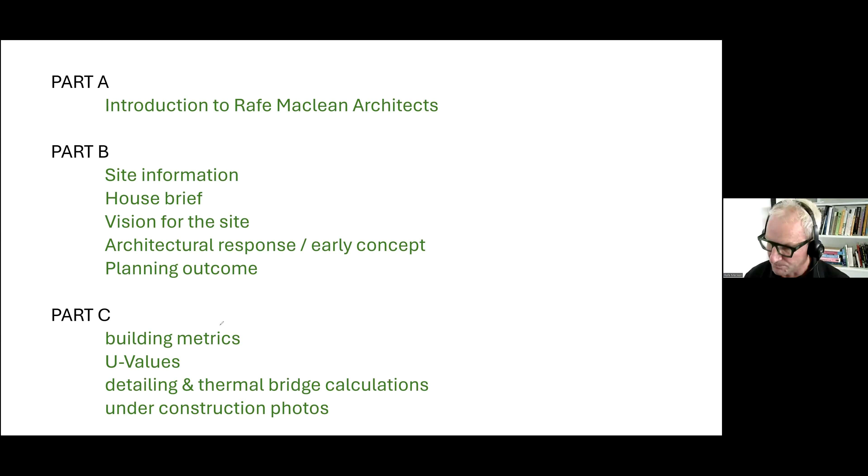Firstly, practice, Rafe Maclean Architects. We're based in Wanaka. Currently we have 6 staff, all here in one studio. We do pride ourselves on designing contemporary buildings that are also very good for the environment, very low energy use, and passive house is one important tool we use - we do thermal modeling on all our projects. Not all our projects are passive house certified.

Looking at all our work, our portfolio since 2005, around 20% of our work since 2005 has been Passive House certified. So we don't do many projects, but that statistic will improve over time because we only learned about Passive House in 2012, so there's quite a period there that we didn't really know what we were doing. Well, we didn't know what we were doing, but we weren't thermally modeling the buildings.

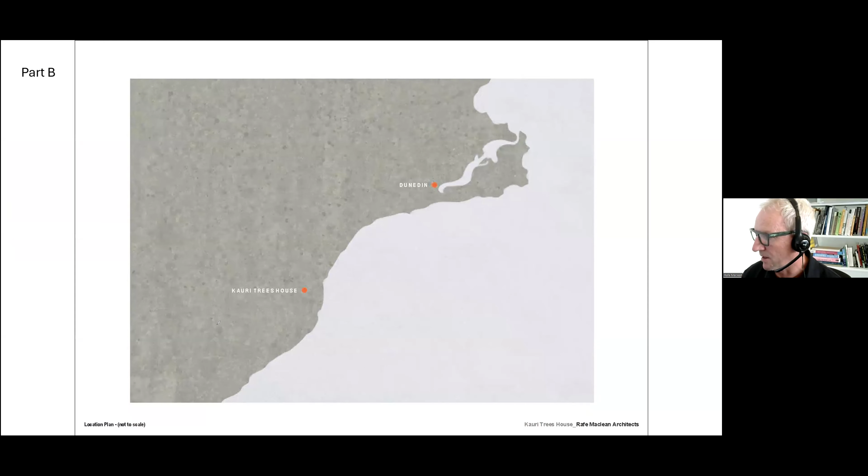About the climate of the site, this is extracted from PHPP on the climate data, so it's been altered for the altitude - altitude is 182 meters above sea level. Interesting thing here is just the exterior ambient temperature. In peak of summer it averages around 14 degrees on average, and then in winter around 6 degrees. So quite a cool environment, quite close to the sea.

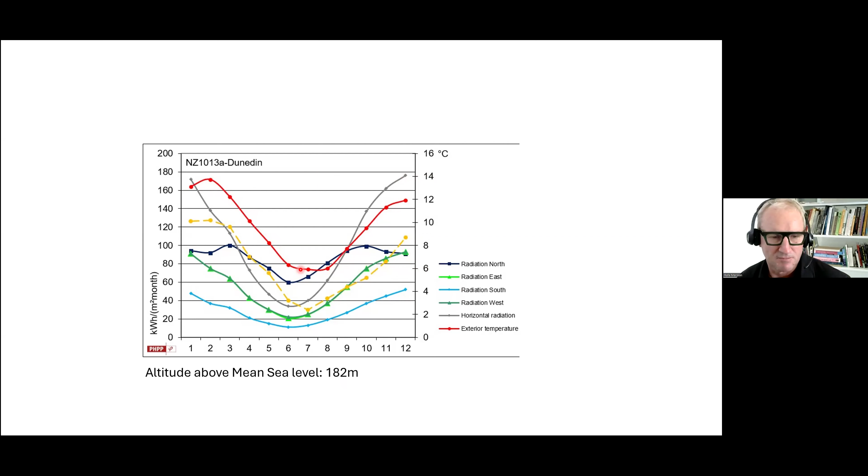And this picture here just shows the sun pathways. I often do this on the first visit to site, just to get an idea of where the sun comes up and where it sets. So looking east, that's where the sun rises over the sea in peak summer, and that's where it rises in winter. Looking towards the west, up the ridgeline, that's where the winter sun sets around 4:30, and then around 9 p.m. midsummer.

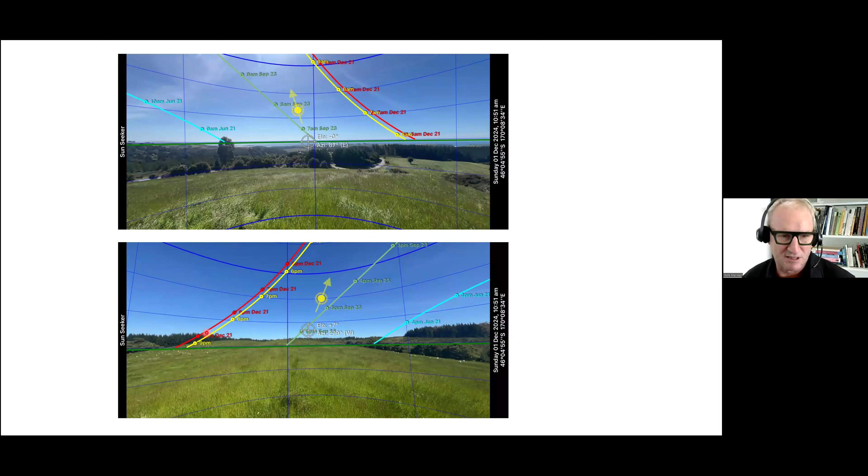In 2024, that's when we were approached by Peter - we were asked to be involved in the project - and Peter's initial brief was around 18 pages long. I think it was probably the longest brief we've ever received in terms of content and requirements.

So this is just the basics from it, looking back at the most important things. Certified passive house - yep, we could do that. Earth sheltered - well, we had to find out a bit more about what that meant. Architecture award winning - we try not to talk about that too much because it's not something you can really anticipate.

Concrete construction. We had some experience with concrete before with precast panels, so we knew the language. At that particular time, I'd just returned from a trip to Japan, and I experienced some wonderful architecture over there using in situ concrete. So I was quite excited to read this and go, okay, I know what the Japanese can do with concrete underground, and so it made me smile.

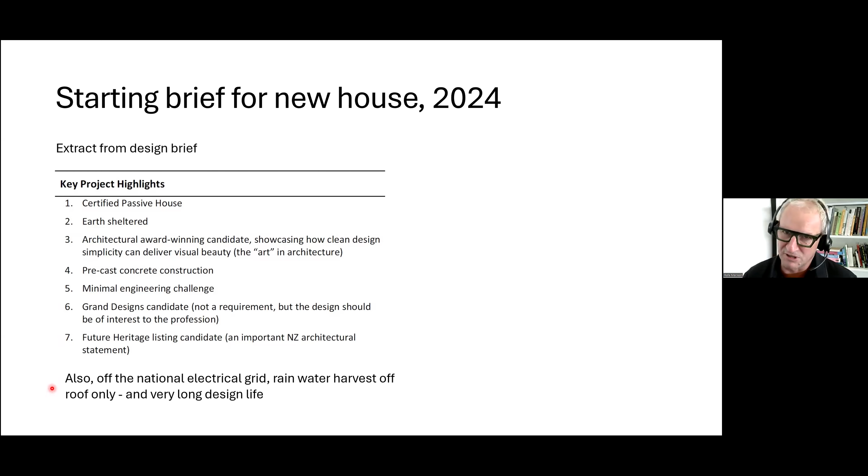About the site, a key driver for the project is Peter's vision for the site. This is an extract from the Kauri Trees website. The address is up there, and I'll mention it later again. This website tells you all about Peter's vision for the property, and the main vision is that he would like to establish the southernmost Kauri forest in New Zealand. He's started by planting thousands of nurse trees, and this year they're going to start planting Kauri trees, which have been propagating in a nursery nearby.

And this is a picture of the site, boundary there, and this is existing native planting in the valleys, and this is pine plantation surrounding the properties. And the site for the house is just up here, on this little knoll here.

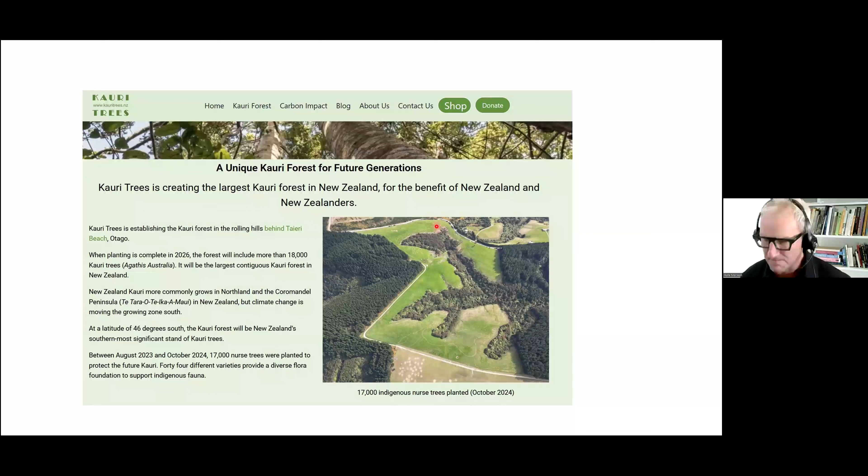Concept for the project. This is just a quick overview of basic concepts that we started with. This is a map of the property of the site. There's the ridge line coming down here, and there's three ideas that I pulled into the project. One is how do we have an underground or submerged building that captured the sea view over here to the east, but also not be totally underground so we can't get any daylight.

So the idea of having a C-shaped building, hugging the ridgeline, following the contours around. And we talked about having courtyards in the building for shelter from the wind. So this C-shape formed its own natural courtyard in the middle. So it was a good start.

And then also thinking about how do we insert spaces into the ground and have livable spaces that we can bring light in, we can see out to the view, and uplift the soul, etc. And thinking about grafting spaces into the land, how do we insert them in under the soil?

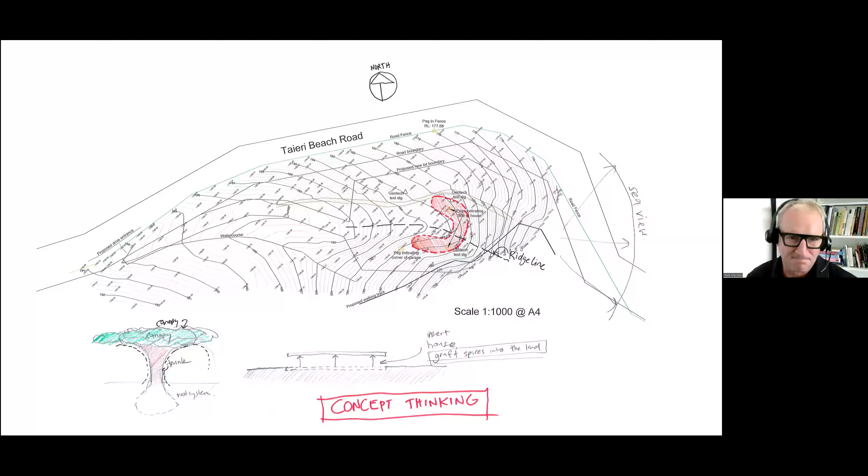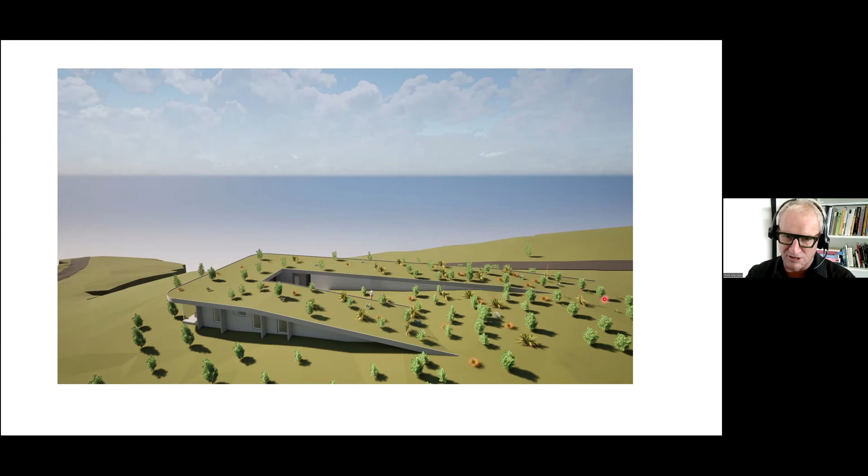The first concept idea was, we've got the C shape going, east out here, and basically when you approach the site from above, the building is camouflaged because the ground's been lifted up and the spaces have been inserted underneath the ground. The word grafting came up a few times. So that was the first crack at it, just to see how the spaces could work and what scale this building was going to be.

And that idea was developed a bit more. We lifted the roof edge up when we started to think about the practicalities of someone climbing up onto the roof and falling off it, and trying not to have barriers. So basically we made sure that the roof was more than a meter off the ground, so no one could climb up. So that was the barrier.

We looked at green roofs, and because we're rain harvesting off the roof, we looked at the calculations about the rainfall. Taieri Mouth gets just over 500 millimeters a year of rain, so not much. So we worked out that the plants were actually going to take too much water from the roof to grow. So we pulled this back to ballast only, and then reintroduced planting as we got an idea of how much rain is actually falling on the property, servicing underground tanks which serve the house.

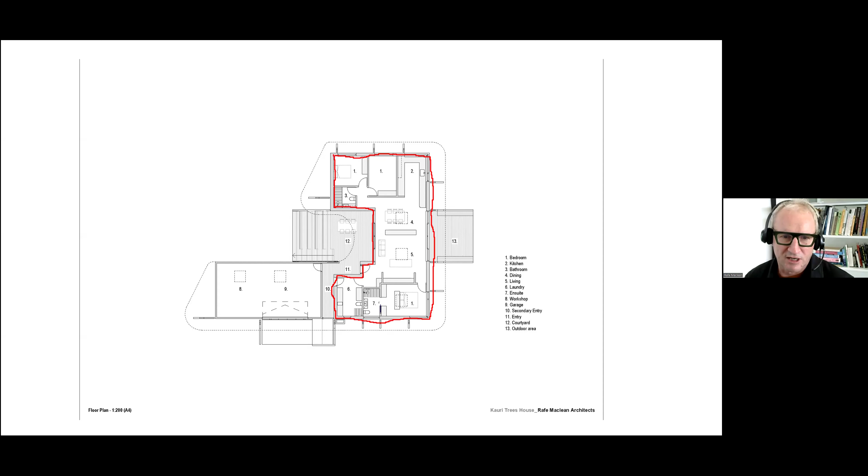Floor plan. So this is the thermal envelope. I'll just draw this with my mouse. So that's the house. We've got 2 or 3 bedrooms, kitchen space, the big window to the northeast, living space here. Main bedroom, ensuite, laundry, and a back entry, main door here.

And this is where you enter from, coming down the ridge line. You come down into this courtyard space, and from here you can look right through the building to the sea. And then this area here is basically the garage space. So that's unconditioned space. It's not insulated at all.

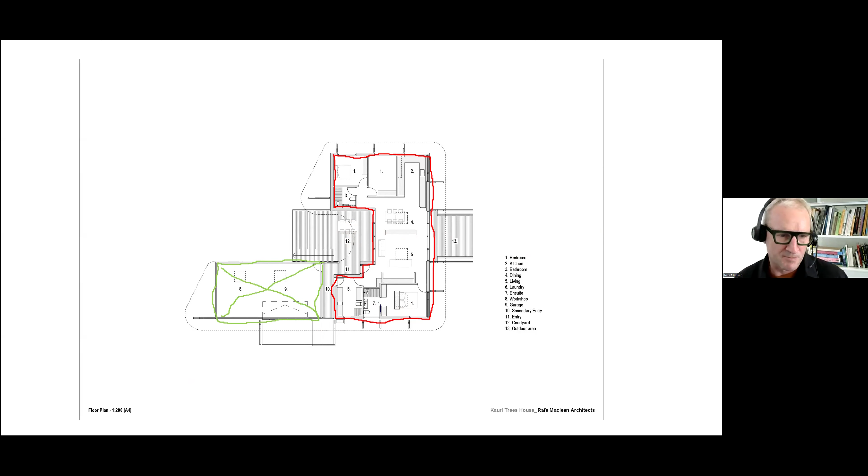Roof plan. So there's the outline of the insulation on top of the conditioned space, and we've got 3 roof lights, and over here we've got the outlets to the underground water tanks. So the water falls on the roof and drains to these points.

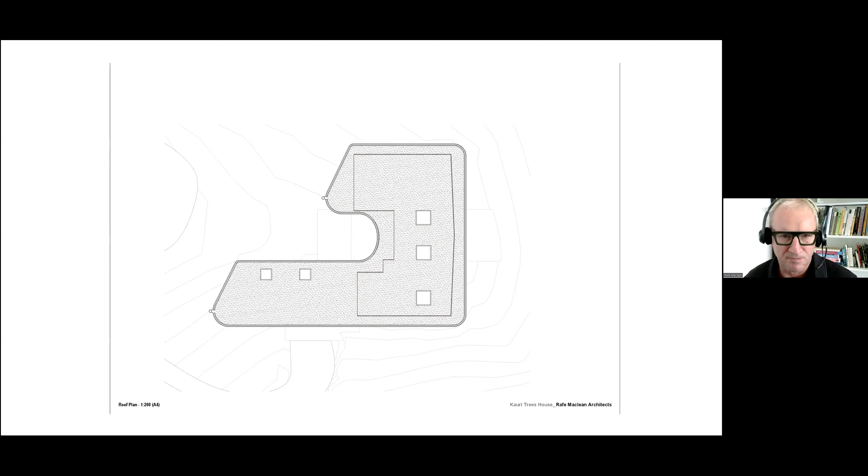And just quickly, I'll just touch on the sections so you can sort of get an idea. These are underground water tanks, and 1.5-degree slope, around about 3.1 ceiling height at this end, at the high end, and about 2.6 I think it is at this end. So quite high ceilings. And we've basically inserted the building but then pushed the earth back. So when you're in the kitchen space or inside, you get the feeling that you're underground or partly underground.

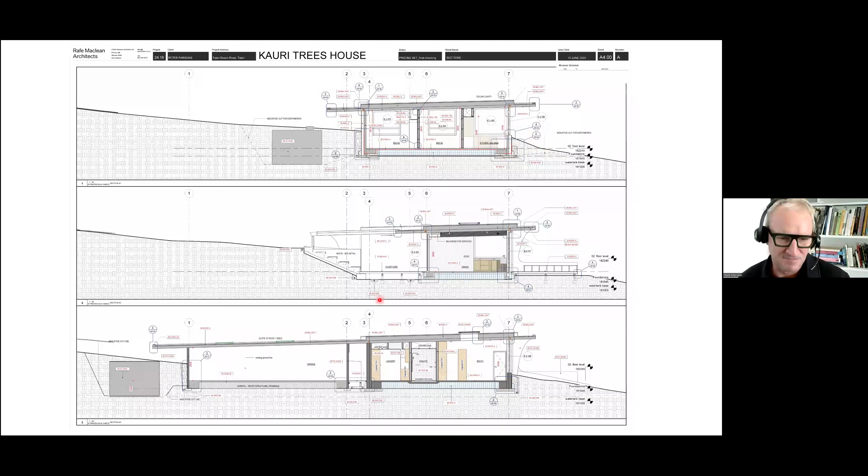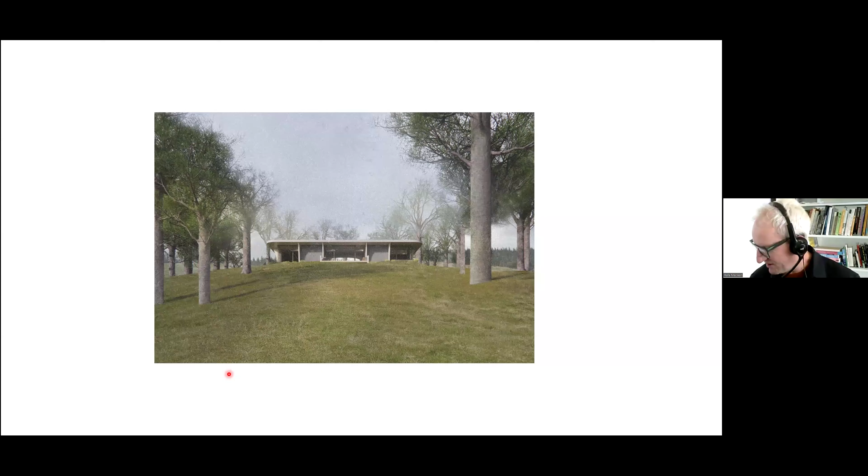And some late documentation stage renderings just to get everyone excited, especially with the mature Kauri trees. So we're sort of projecting a few hundred years into the future. Yeah, so it's a view from the east. View from the north, southeast, I think it is. Actually from the northeast, sorry.

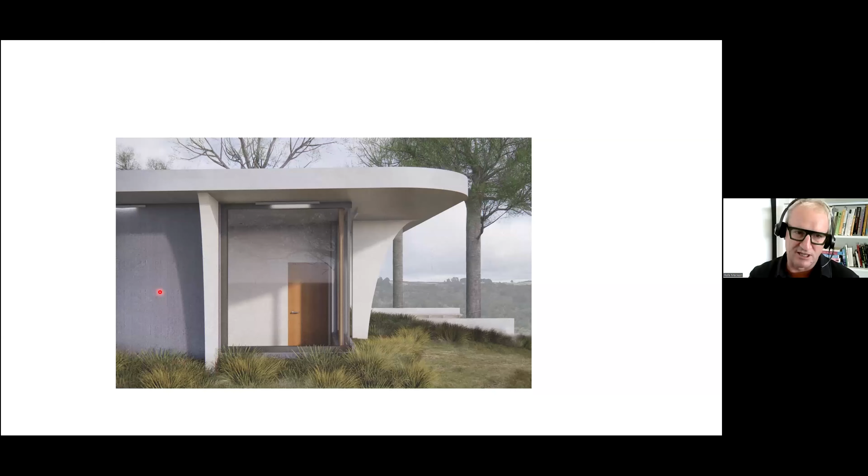And that's a concrete roof, and we have got these curved buttresses that hold up the roof, going back to the concept of that shape of the trunk going up to hold the canopy. So all this is all in situ concrete. The roof, these are precast buttresses, and then over here, which is part of the thermal envelope of the wall, that's a Sto plaster system over insulation onto a concrete panel.

And that's a view from the western courtyard. So you come down the steps, and you've got a view right through the building to the sea beyond.

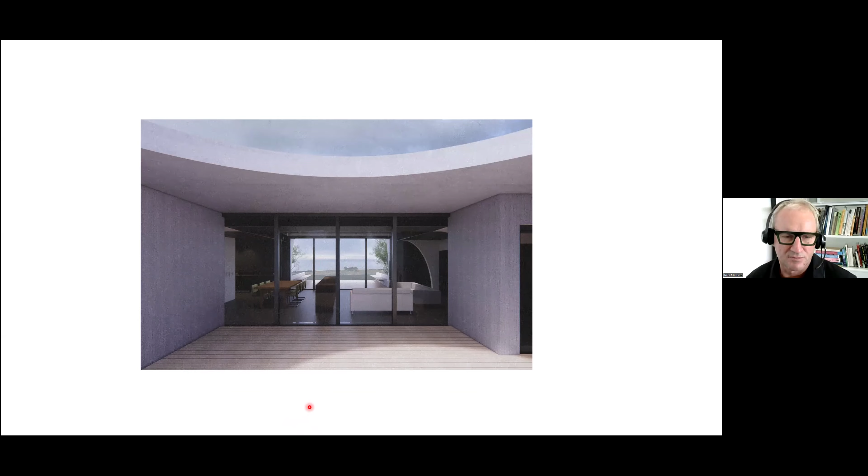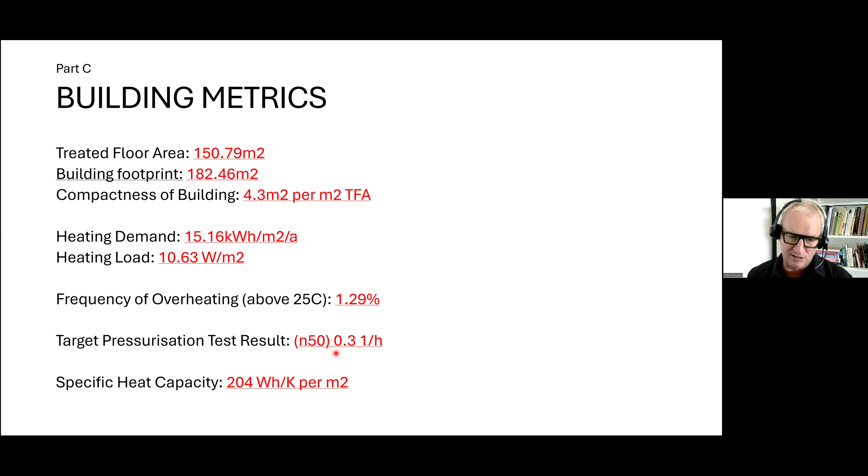And just a comment on that: we've been putting 0.3 or 0.35 into our PHPP at a pre-construction stage, because what we find is that if we put 0.6 in and the airtightness test comes back at say 0.15 or 0.2, it's a huge shift, and we find that overheating jumps up a lot because of that. So if we go in at 0.3 or 0.35, if there is a shift, it's not as big.

And we're finding that 0.3 or 0.35 is not too hard to obtain now. A few years ago, it was quite hard, but now with the contractors being more skilled at it, we're getting better results. And a comment on the specific heat capacity, which is the thermal mass in the building: this is the highest it can be in PHPP, because the floor is concrete, the walls are concrete, and the roof is concrete. So we use that. That's the first time we've done it that high.

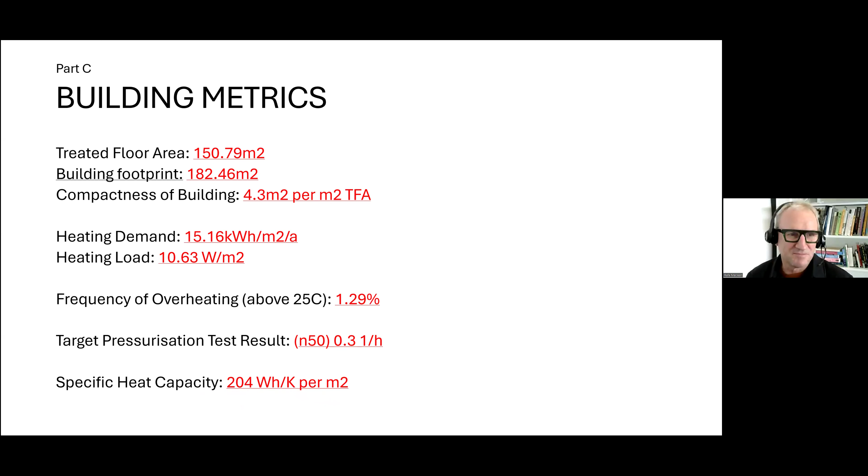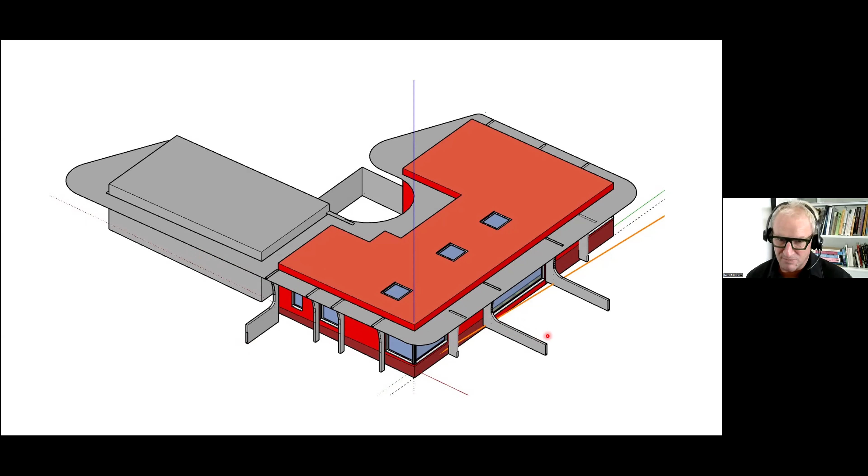Using Design PH, which is the SketchUp plugin for PHPP, was really useful in this project, because of the shading from these buttresses, very hard to manually calculate those. The red is the thermal envelope with the windows, and the grey is the self-shading of the building, so overhangs, buttresses, and there's a garage over here as well. Beyond this is the site shading, which is the surrounding hills. Just another view of the Design PH model.

Jumping into the makeup of the building, because all the envelope is all the same material, these are very simple compared to, say, a timber frame building. So the floor here, we've got basically 100 mil of concrete, and then 500 mil, half a meter of EPS insulation. And then the roof, we've got 180 millimeters of reinforced concrete, and then 300 millimeters of PIR, which has an aged derating factor in there as well, and then the membrane on top.

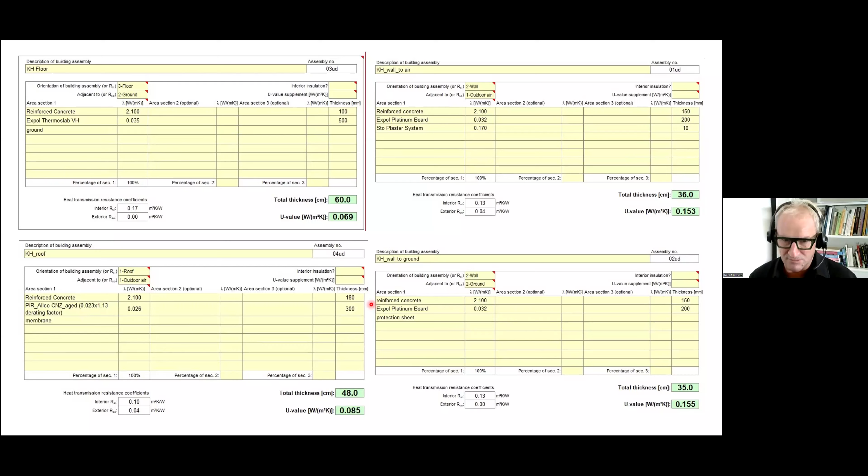And then two wall conditions. One is to air, and another one is to ground. So to air, we've got the concrete panel, which is a precast panel, 200 millimeters of EPS, and then the Sto plaster system. And then underground, we've got concrete, EPS, and a protection sheet. So very, very simple in terms of the envelope makeup.

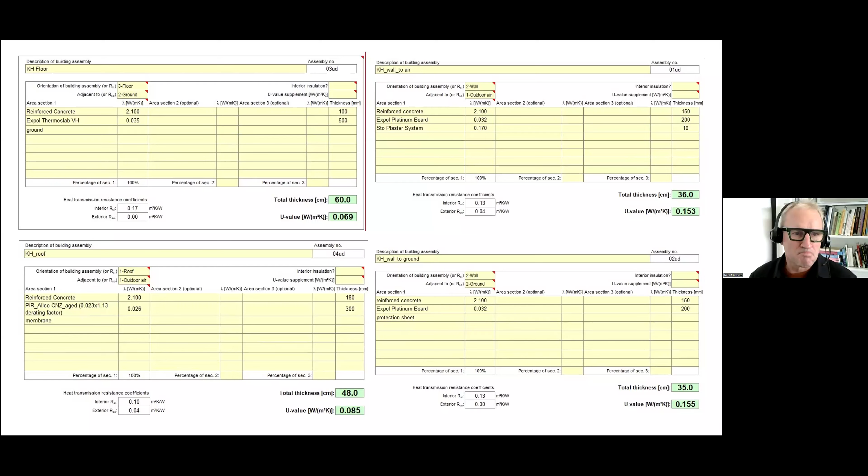Just going to talk about this detail at the bottom here first, which is the foundation. One thing we work with a lot is the thermal bridge software. We use Flixo, and we used it a lot in this project to optimize the detailing.

And also working alongside the structural engineer, especially around the bearing capacity of insulation, and making sure that it's going to work for them and also work for us, and also working with, in this case, Allco, with the flooring, the tanking membrane, and then its junction to the Sto system on the walls. So quite a complex detail, which had quite a lot of iterations just to get right.

Now, for example, here we've got the platinum EPS on the outside, which Sto had to be happy with using, and also Allco had to be happy using as well. And then underneath we've got Slab X EPS for the bearing capacity underneath the foundation, and then there's this 500 mils of, I think it's just S grade EPS over here.

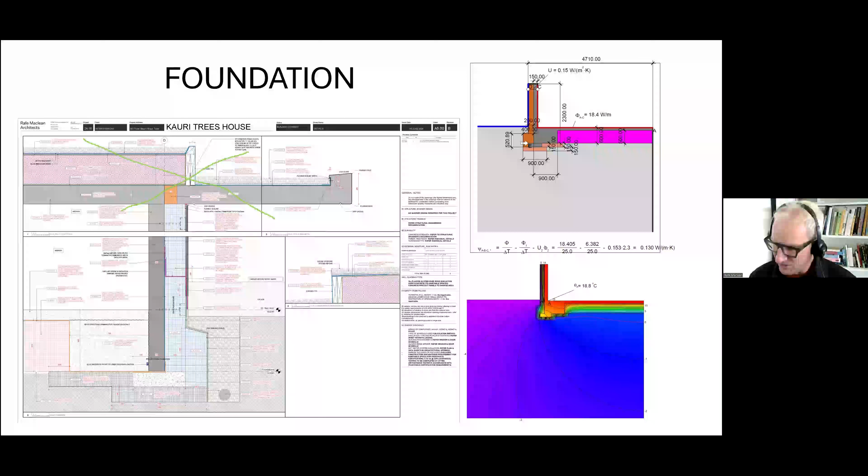The eaves are particularly special, unique. I'll try to explain this. We've got a concrete roof here, and it extends out to form the eave. And to make this thermally efficient, we've put a thermal break here, and of course that needs to hold this eave up. So we've used a balcony connector, which in Europe is typically used for balconies outside of apartments. So this is imported technology. This is a picture of one system here.

And you can sort of see over here, these thermal pictures, that without a connector, you can see the lines here and an internal surface temperature just in there of 16 degrees. So it's a bit of a cold spot right there. And then with the connector in there, this internal temperature jumps up, and it's quite a smooth color going right around, which is fantastic.

The conductivity of these isn't that great. It's about 0.13 from memory, which is about the same as a piece of wood, but it's got the strength to hold the balcony up, hold the eave up. So this was quite a task, because we had to get the BMC, the structural engineers, comfortable with this system before we could specify it.

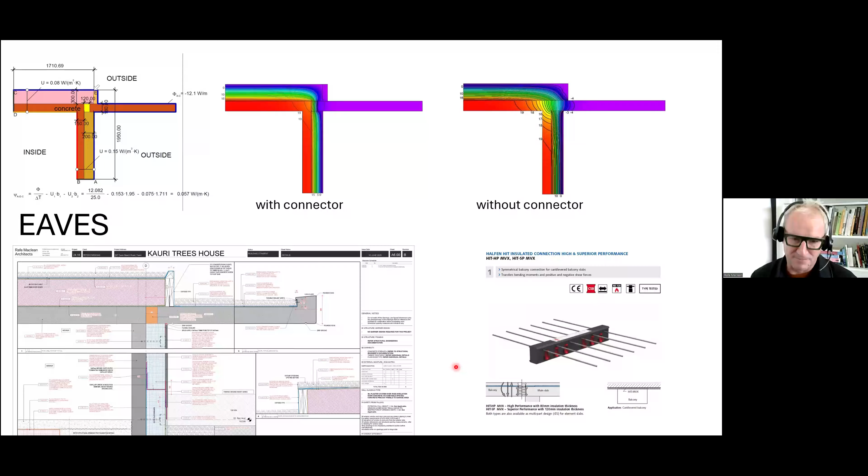And then the windows, we used InnerSign windows from Eco Windows in Hamilton, and the uniqueness of these is they've got a very low Uf value of around 0.58, 0.6. And we also took the insulation over, this is a plan detail here, this is the exterior, took the insulation over the face of the window. Sto do this in Europe quite a lot, so the plaster comes on and just finishes against the window face there. So by doing that, we actually got a negative thermal bridge coefficient here, which is a first for us.

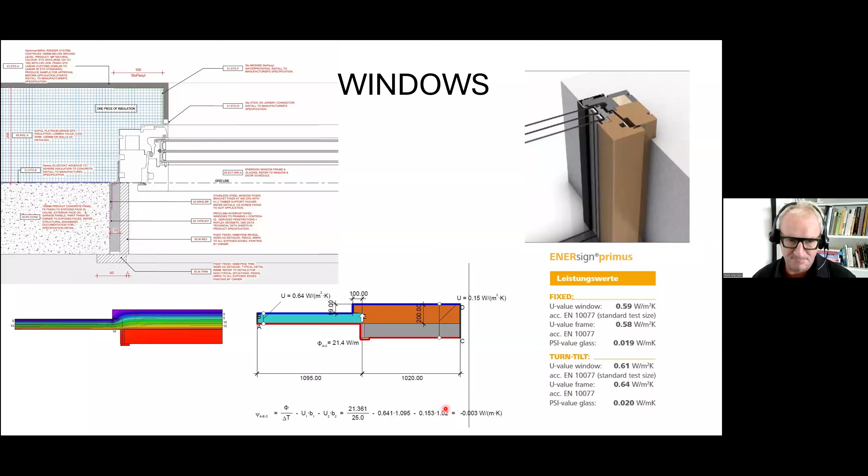And there's some details here just showing how the insulation comes over the frame. And this is the head detail here, so we have a drip edge just there.

And roof windows, a first again for us. Working with Eco Windows, we found a window that would work from Fakro, and designing it along with the engineer and Allco, the membrane people, how this would work, and then thermally modeling it to make sure it works for us was quite an exercise, things that we learn through the Passive House course but don't actually do in reality. So they're quadruple windows.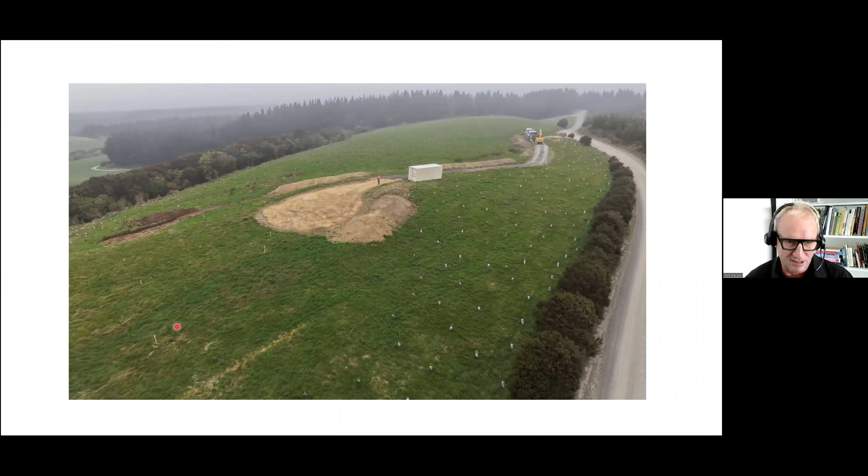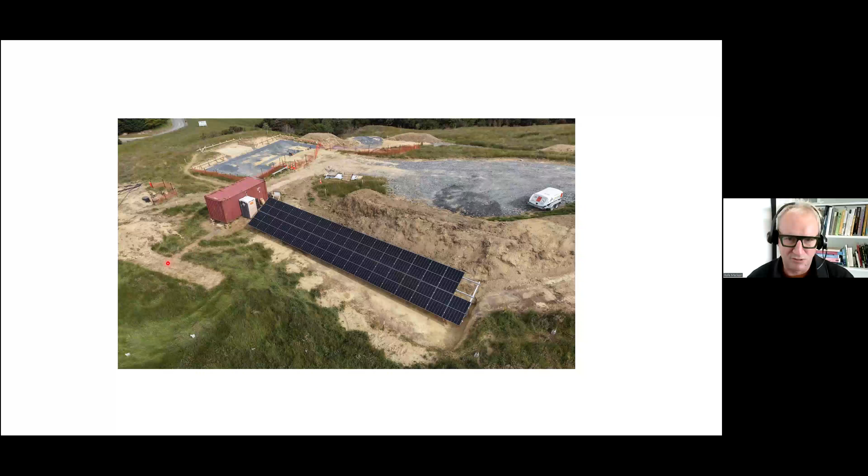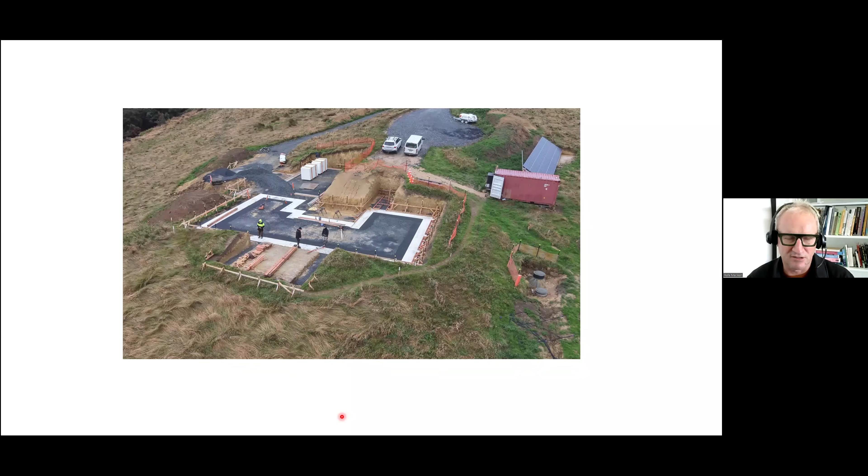Being off grid, Peter got the solar array installed quite early, so the builders can use the power off that instead of using a generator. So that's quite useful. And I'll just run through these photos quite quickly, there's quite a few of them. Foundations going down. That's the Slab X insulation, I believe, that goes underneath the panels.

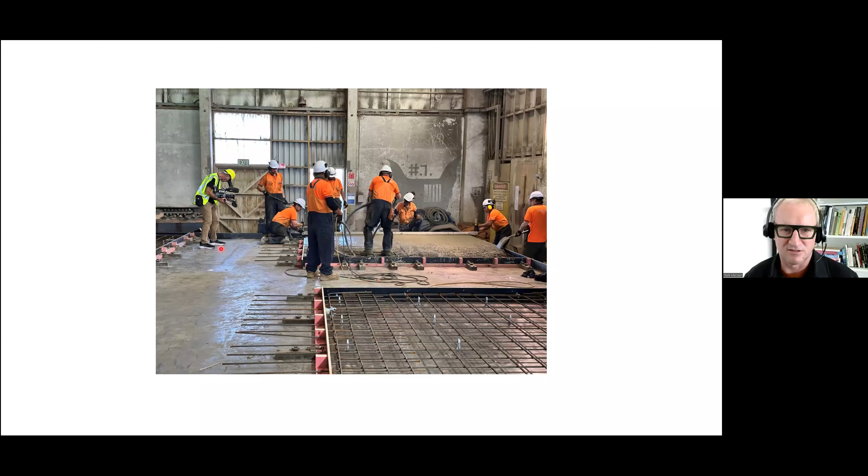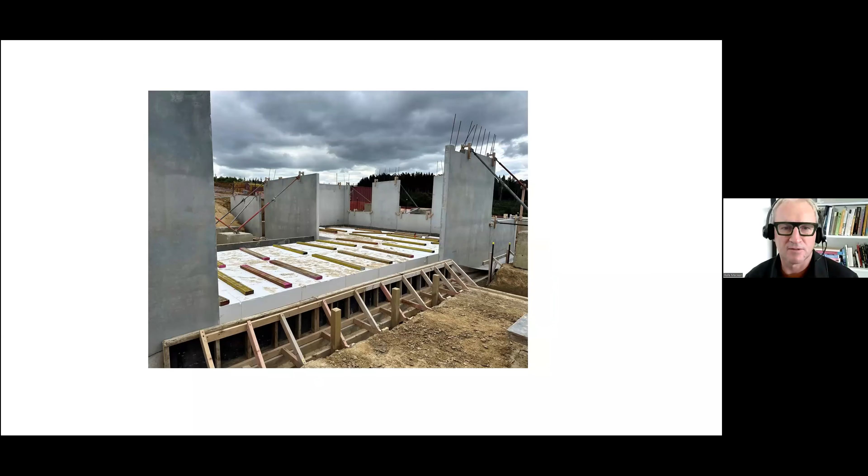Picture from the precast panel place in Invercargill, along with the Grand Designs filmer. Panels going up. And the curved buttresses at the factory, Stresscrete in Invercargill. That's the name of the prefabricator.

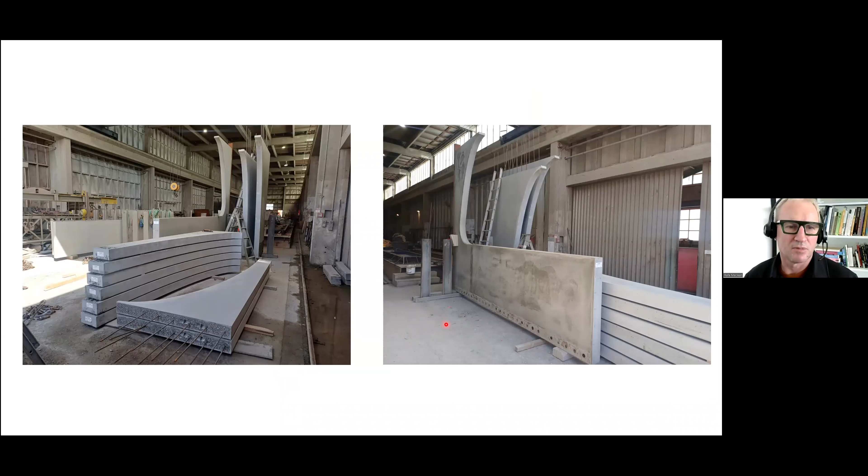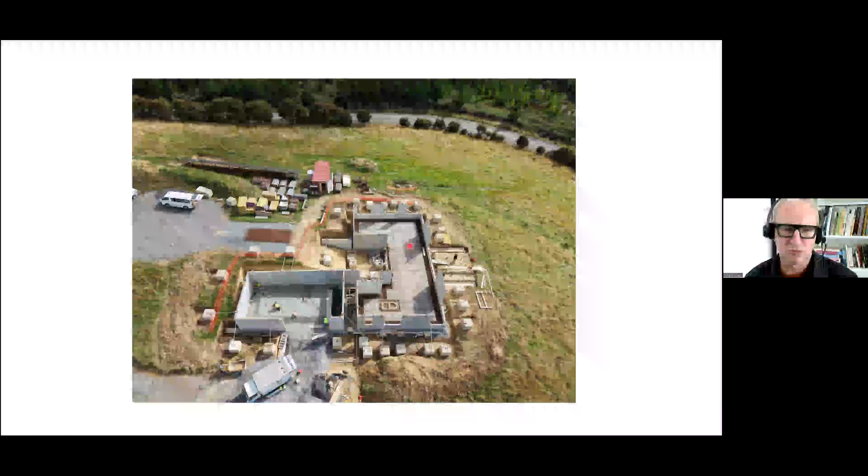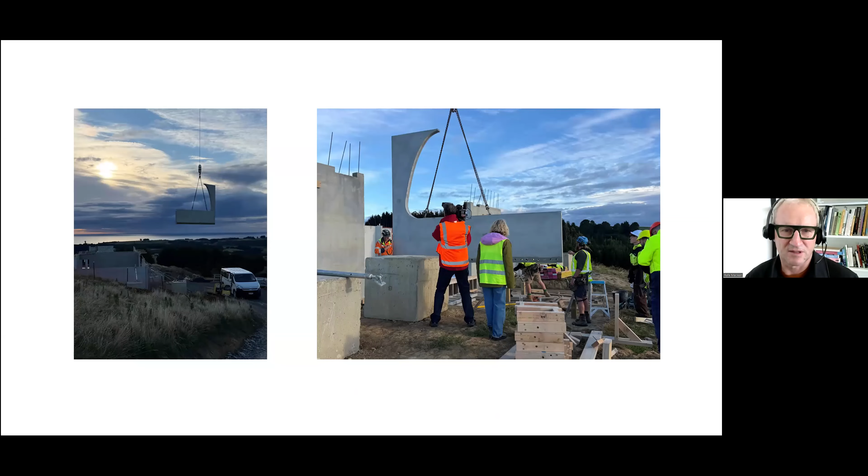And that's a picture from the end of the day. So we've got all these buttresses installed, and there's a gap between the buttress and the wall so the insulation can go past and still leave a gap for maintenance. I think there's about 300 mil gap there, so there's about 100 mils gap between the back of the buttress and the Sto plaster.

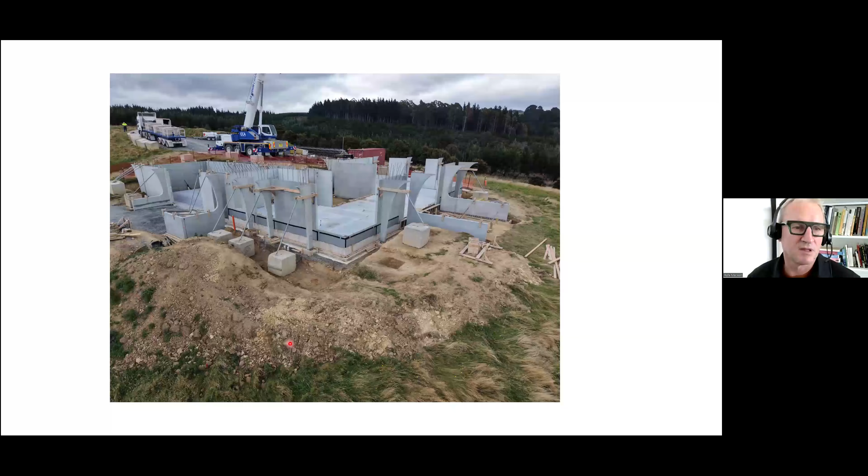Fabulous, Rafe. Thank you so much, and you're spot on time. Well done. Yeah, I mean, you can just really tell with your slides that this really is black belt passive house design. This isn't, you know, for the faint-hearted. So, you know, the whole team should be very proud.

So hopefully some people have got some burning questions for Rafe, but we'll move on to Warren now.

Yeah, I think you can see my screen. Can you? Are you able to see the speaker's screen? Is that what you're seeing? Yep, brilliant. Okay, all right.

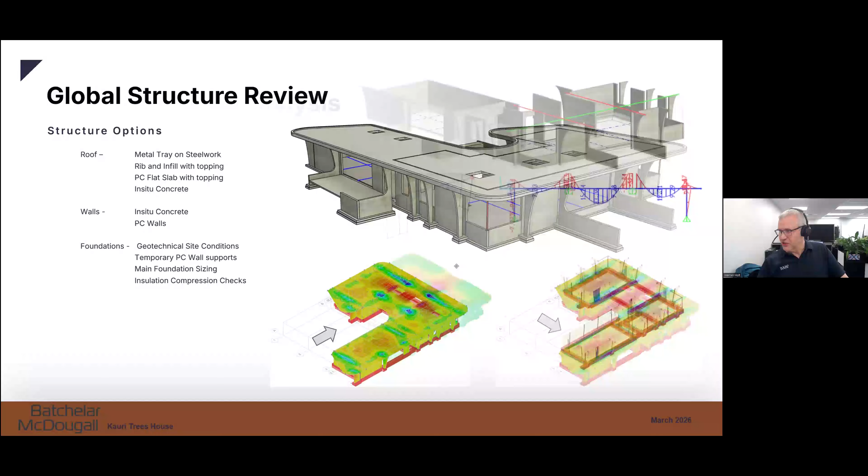That determines our specification for the foundation insulation, but we still had to make this thing work. There's lots of different pressures on this building that we've got to take account of. So after our 2D initial sizing, we knew we were going to get somewhere around the correct profiles.

We had to do a more rigorous analysis using the ETABS model. The roof effectively becomes a rigid diaphragm which all the walls are connected to, and it distributes all the lateral loads around the shear walls around the perimeter and internal of the building. So for each different direction, going towards the east and towards the north, we have different areas where we're in compression and tension within the concrete slab. We have to determine what the stresses are in each of these zones, and then increase the reinforcement from mesh to cater for those loadings as well as the gravity loadings. So it's quite a maze of work to do.

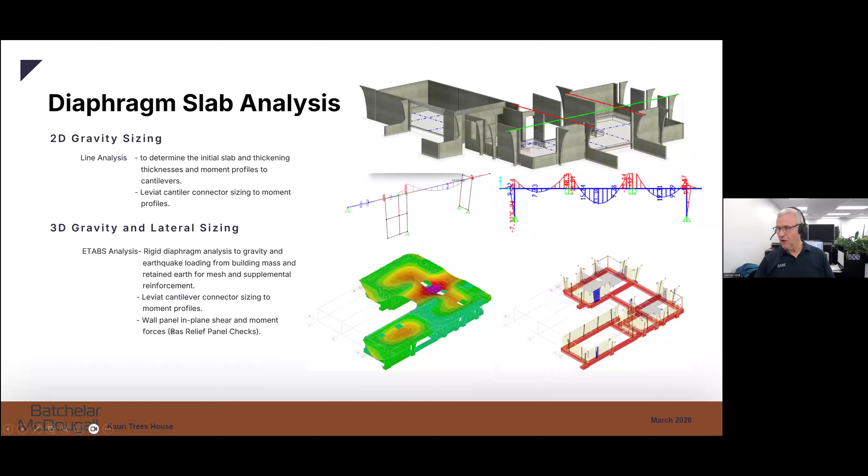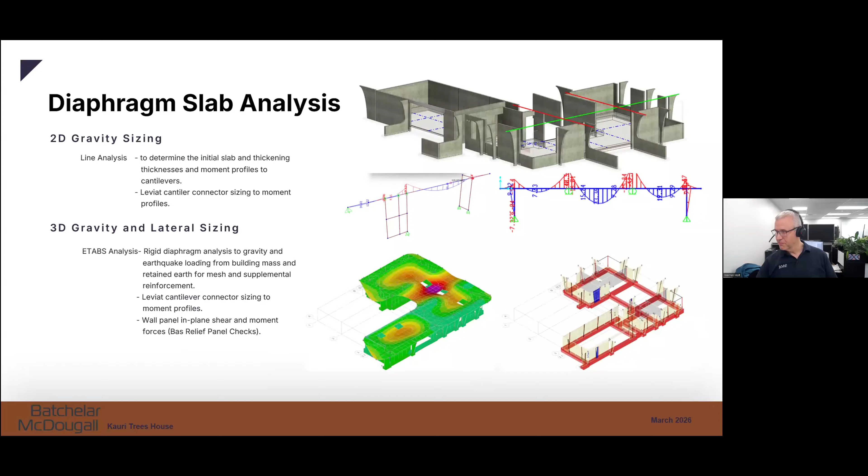And I remember right at the very beginning, we'd done all of the panel walls, and then Peter came back to us with these little bas relief areas around the building - there's 3 of them. He determined that he wanted that, and we advised that 50 mil was probably the deepest we could go to with those. We had to look at our analysis for these panels and made sure that in the residual 100 mil thickness of the PC wall, we had enough strength within that area to cater for the loadings imposed on it. You can see there the notch that's got there for the thickening that goes over the core areas of the wall.

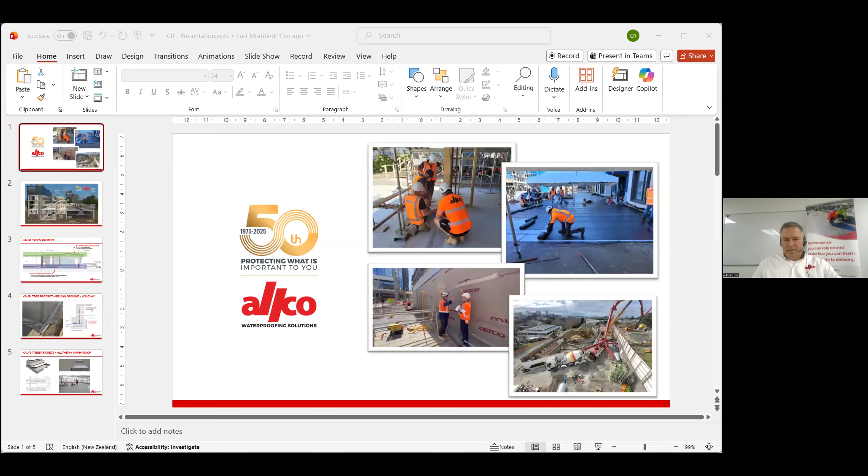Thank you for the invitation, and thank you to all the team for inviting Allco to be part of this unusual project. Nice to be part of something different.

Allco, as it says there, we've been around for 50 years as the name Allco, but more recently a lot of people know our Volclay waterproofing system, and I'll talk about how it's been detailed into this project. Something that we do differently to a lot of membrane suppliers is that we have a team that goes around the country verifying that the systems we say are suitable for a project are actually being installed properly, which is a little bit unusual for a supplier.

I'll just start by covering the areas we supply products for, right across the building envelope, but typically based around membranes, from green roofs, warm roof systems, across the balconies, car park membranes, and down where most of our business is, below ground.

That's our Volclay system, for being pre-installed perhaps onto precast panels, or laid under in-situ concrete slabs. Lift pits are one of the mainstays of our business, because that's the lowest portion of your building usually, and has no drainage in most cases.

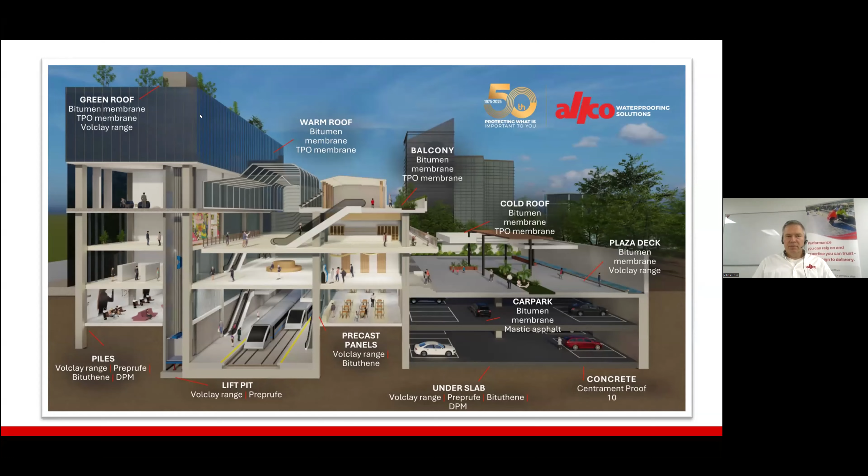We do a number of systems, and as mentioned at the beginning, they are distilled from around the world to achieve certain things for certain purposes. So we don't sell sealants, we don't sell products outside our quite limited scope. What that achieves for us is to be very specialized and provide better support to our clients, and thus their clients, providing the best solution. As in this case, it is of course the best solution.

Now, when we were approached about this job, it didn't come across as unusual. We detail a lot of waterproofing products to have a waterproof building. What we'd normally see is perhaps an architect coming to us saying, oh, I've got a very high water table, I want to protect my structure from rising groundwater.

In this case, when Rafe came to us, it wasn't so much about having a problem that needed solving. It was, I've got a building, I want to increase the durability of that structure that's in the ground. There's moisture in the ground—how are we going to protect that? How are we going to detail all of these junctions?

How are we going to detail a membrane that will protect the main concrete structure, as well as providing some protection to the insulation? Insulation in this case does have the capacity to absorb water, so we've got to detail something that's going to protect that, so it acts as insulation as optimally as it possibly can. That's the portion in ground.

So we're protecting that concrete, adding durability to it, using our Volclay bentonite membranes. Bentonite is volcanic clay, so it's a natural material, but the aspect of it is that it's a self-healing, self-sealing membrane.

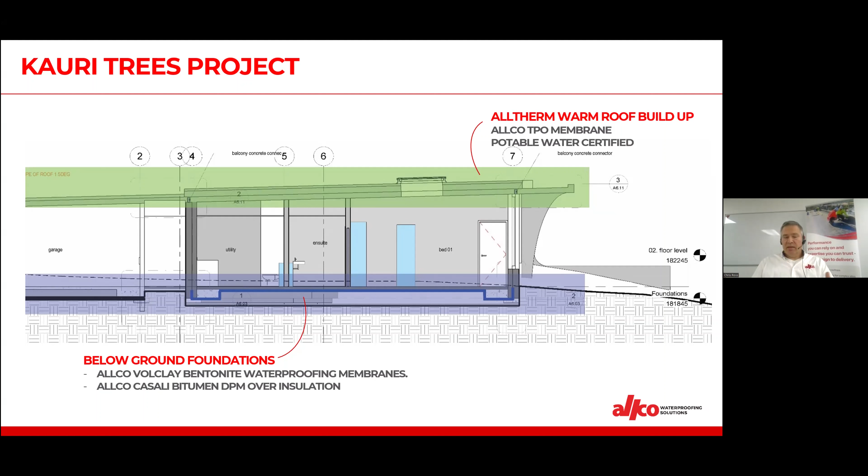A couple of specific aspects in the foundations, as I mentioned, the Volclay system. Something that Allco do, and myself specifically, is we do specialized details that match, in this case, what Rafe was indicating in terms of the structure and the insulation. Our detailing then needs to match specifically - we're not going to just say here's our typical details, because this is not a typical building. So we need to match it up so that the council and everyone is seeing that we're all on board and providing a system that's going to function properly.

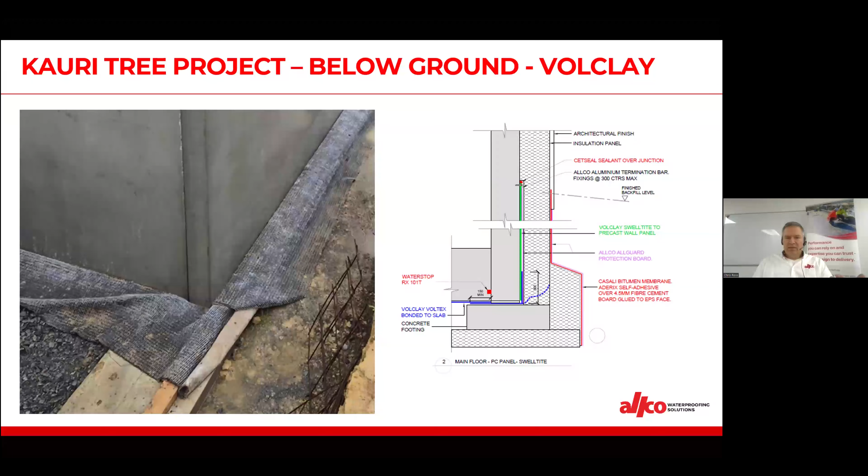And the all-therm warm roof system - we should hopefully know what warm roofs are now. We've got a vapor barrier sitting on top of an in situ concrete substrate. Then we have our PIR, nominally at 140 mil thickness, giving us an R value of 6.6. Then we have the cover board on top, and the membrane on top of that. In this case it's a fully bonded system - there are no mechanical fixings, so we're not getting any thermal bridging across. So it's an optimum design.

On top of the membrane we'll have the aquadrain, which is a plastic cone system for the drainage void underneath, then a filter fabric on top of that, and then ballast placed on top. What that's achieving, from a durability point of view, is a protected membrane system - while the membrane can be exposed to UV, placing ballast over the top provides extra durability. So we're not having to worry about it after the 20 years the product is warranted for - we've protected it from the elements that would degrade it anyway. We're actually building a much better system than we would specify as standard.

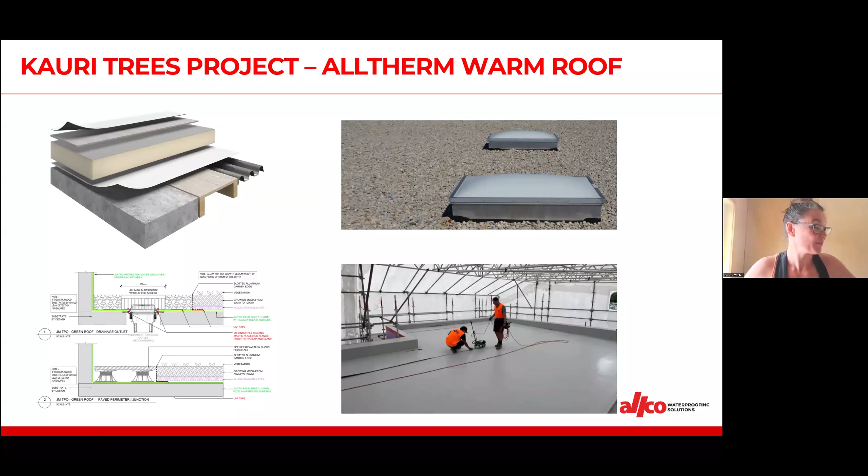And that sort of rounds it up from my end. Wonderful, thanks Chris. That was really great to hear about those natural self-healing membranes that you're using with the bentonite. Very, very cool.

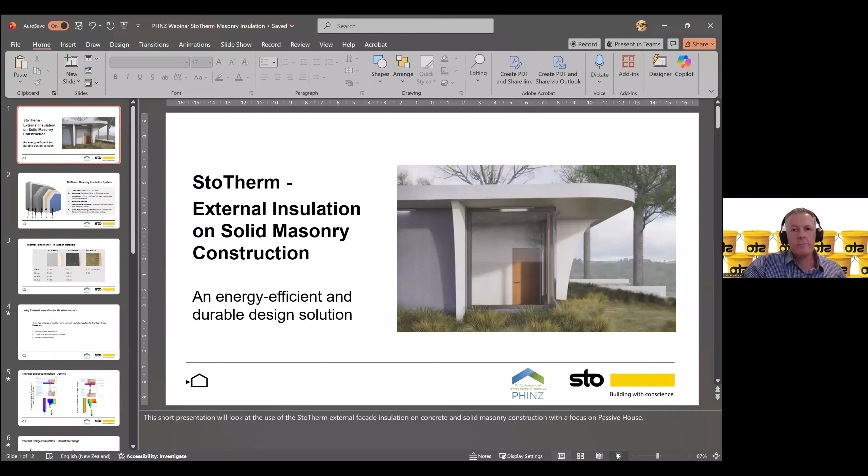Thank you. Okay, yeah, like Chris, we love being involved in these sorts of very unique projects. So thanks for the opportunity to come along today and just give you a quick spin through the StoTherm exterior insulation system, focusing on passive house design.

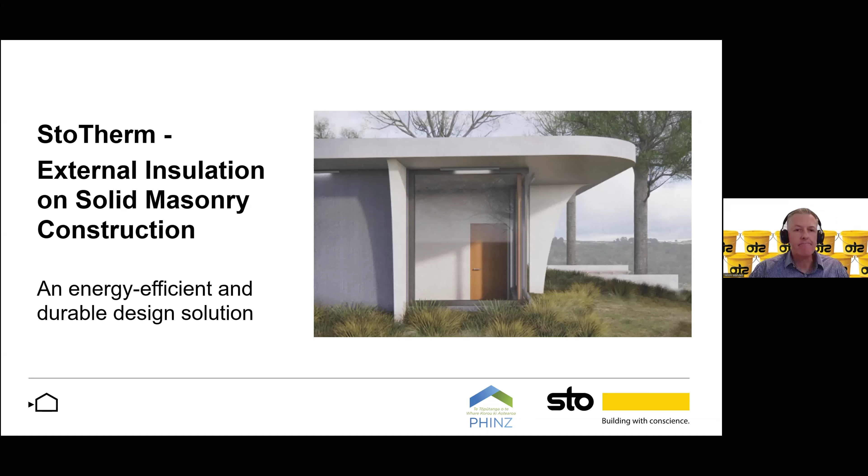The StoTherm system itself is a multi-layer system, starting with your concrete, your masonry structure. We adhere insulation panels, which can be EPS or Rockwool, being the two most common. We fully bond those insulation panels to the concrete with an adhesive render and supplement that by installing mechanical anchors through the panels themselves as well.

Once the insulation is installed, the full system is covered with a base coat render, in essence, to level the surface. Following that, our StoArmat synthetic reinforcement render, which incorporates a fiberglass mesh, is laid over the top. Finally, the system is finished with any of our range of Stolit coloured finishing renders and either a facade paint or a Sto clear coating.

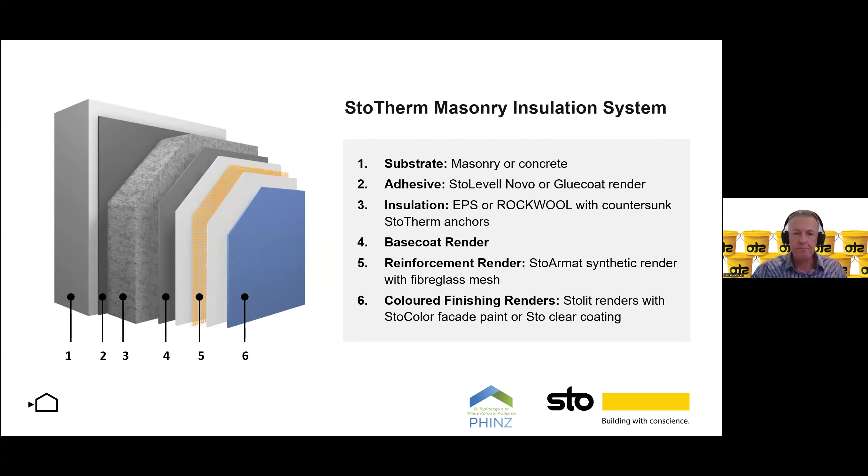The most common insulation materials are obviously EPS and Rockwool, as I mentioned before. On this project, Rafe specified the graphite infused EPS, the platinum board. 200mm thick platinum board achieves a material R value of about 6.25. That insulation value is directly relative to the thickness of the insulation material. So you can see, if you were to specify 300mm of graphite infused EPS, you can get over 9. There's really no maximum limit per se in terms of insulation thickness.

Apart from Rockwool, Rockwool is limited to 100mm at the moment from a render perspective.

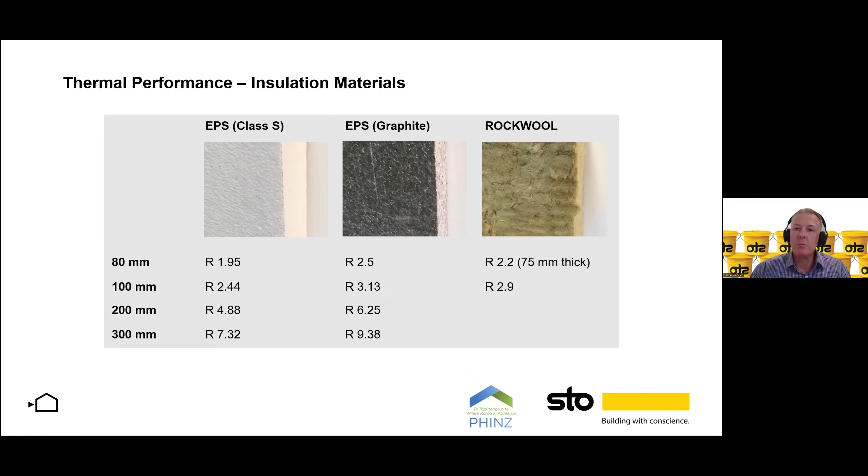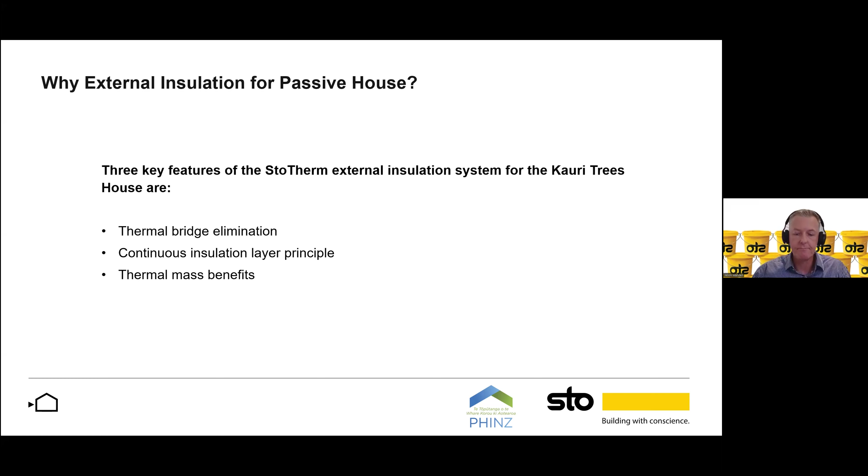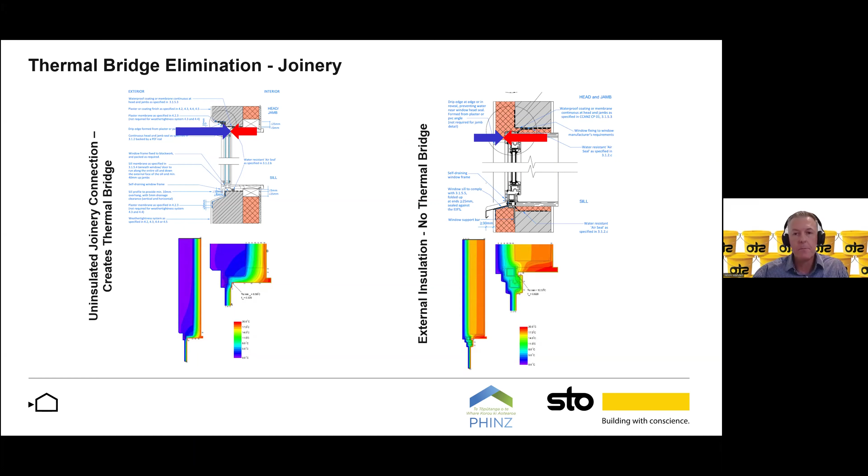Another key area or potential area for thermal bridging is actually the mechanical fixing of the insulation material itself.

Now, what that does is, I'm sure everyone's probably seen it before on cold mornings on good old EIFS buildings, leopard spotting. You can sort of pick out where every single insulation fixing is. Over time, that can permanently change the appearance of the render finish. We avoid that by using our StoTherm recessed anchors.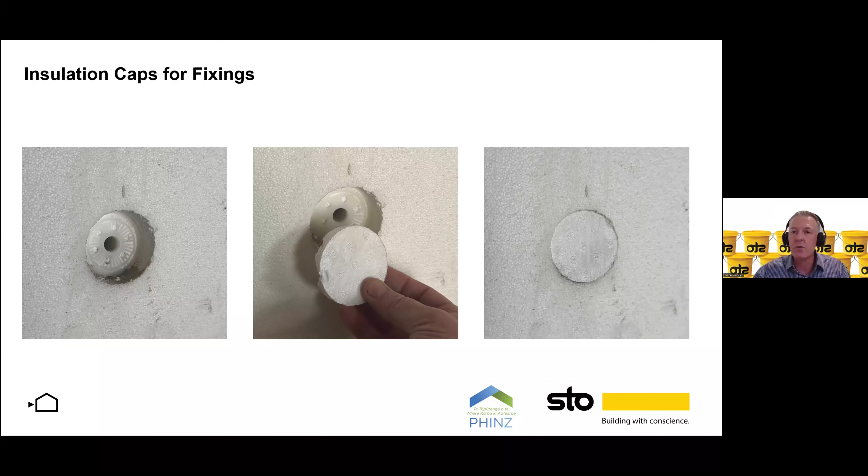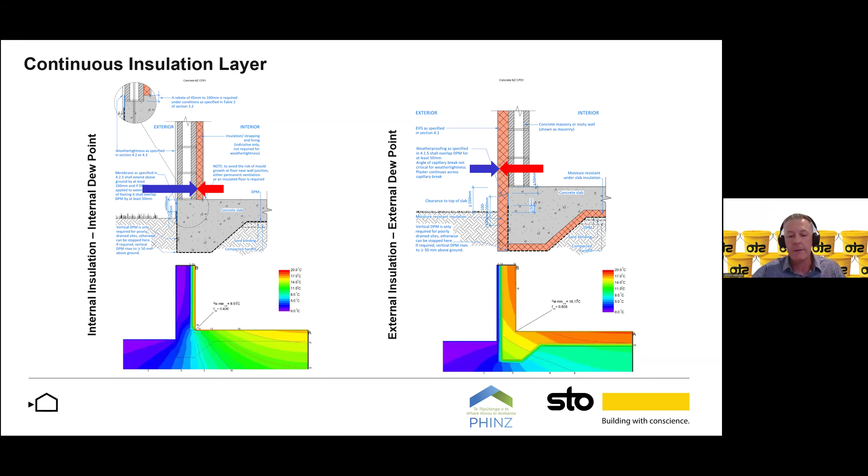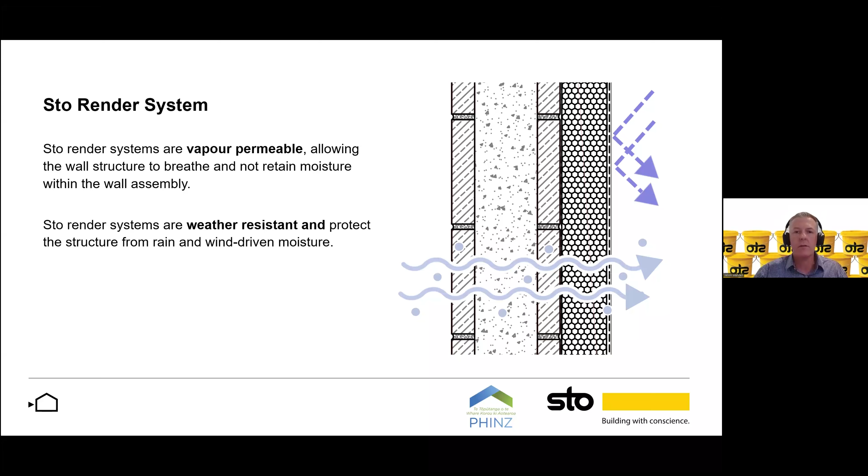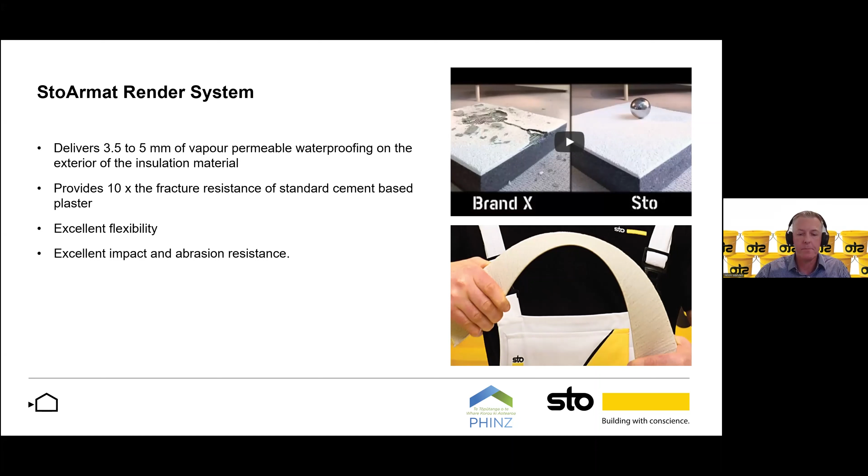So just to summarize the benefits of the Stotherm system, we can take advantage of the thermal mass. So the thermal mass and heat retention capability of the masonry wall is fully utilized. The building facade is protected from heat loss and gain, and dew points form on the actual outside of the structural wall within the insulation layer, not on the interior surface. And incorporating things like our Stotherm anchors and consideration around joinery, connections, etc., we can eliminate thermal bridges and contribute to that continuous external thermal envelope.